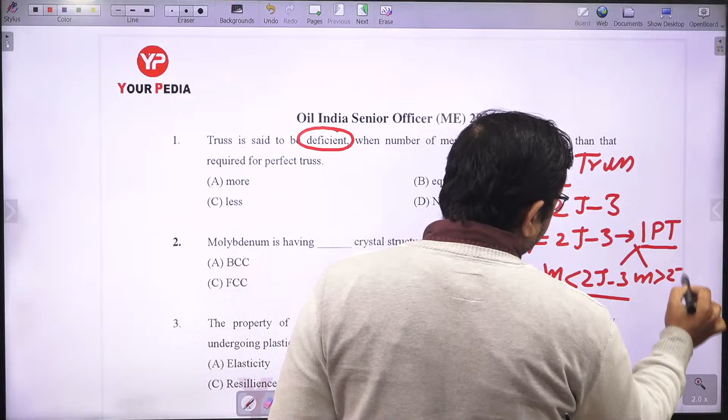So let's start. First question: the truss is said to be deficient when the number of members in truss are (fill in the blanks) than that are required for a perfect truss. For a perfect truss, the number of members must be equal to 2j minus 3, where j is the number of joints and m is the number of members. This is the condition for a perfect truss. But if m is not equal to 2j minus 3, this is called an imperfect truss. In imperfect truss we have two conditions: if m is less than 2j minus 3, this is called a deficient truss; if m is greater than 2j minus 3, this is called a redundant truss. So for deficient, the number of members is less than the actual required member. The correct answer is option C.

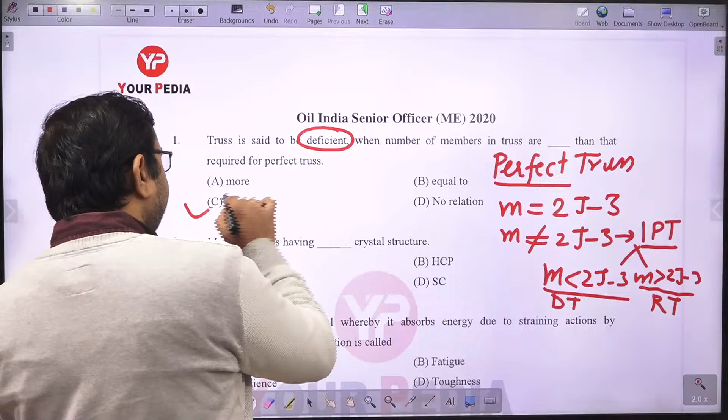Next question: Molybdenum is having (fill in the blank) crystal structure. The correct answer is option A.

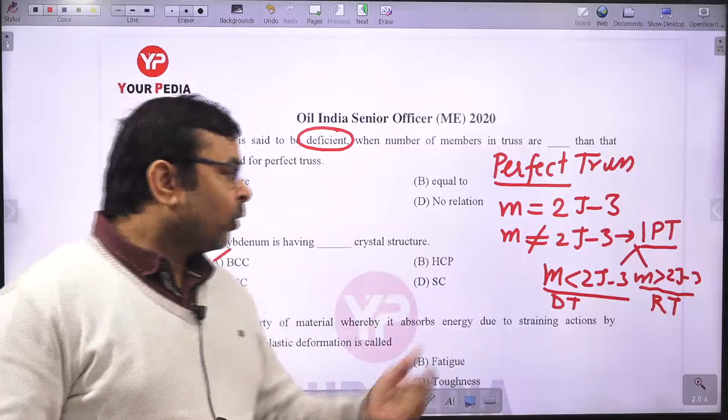Okay, let's see another question. The property of material where it absorbs energy due to straining action by undergoing plastic deformation is called as...

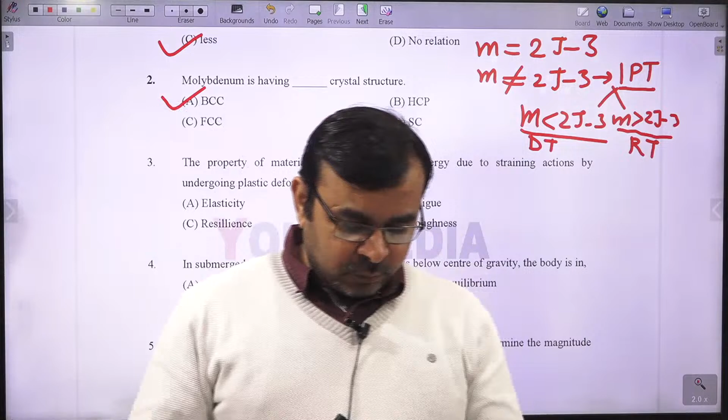This is practice for you, so you must give your answer. Rishabh Dev Mishra, this is for mechanical engineering, not for electronics. So now tell me which one is the right answer.

Option C? That is resilience. Absolutely wrong. Let's see why this is wrong. Here it's asked about undergoing plastic deformation, and resilience will always consider elastic deformation. But here what is happening is plastic deformation. So you must remember this point. This is very important.

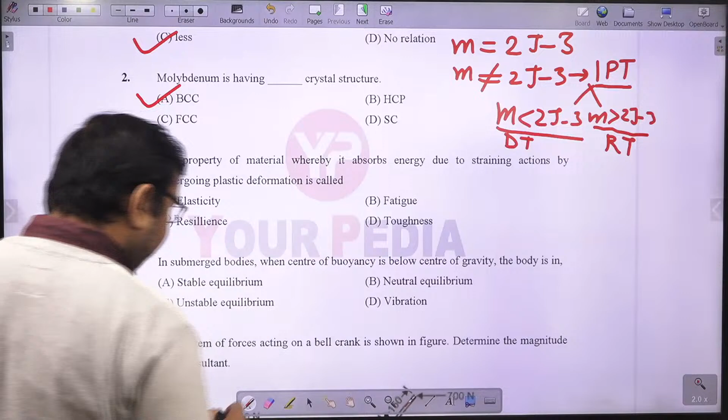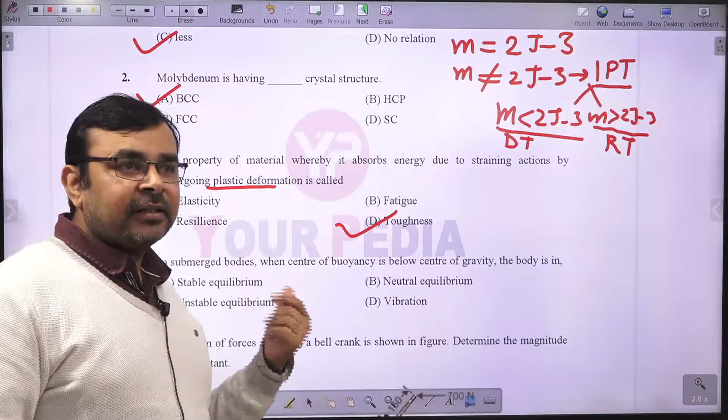Elasticity is different. It just indicates the Young's modulus, you can say, or how much material can regain their original shape and size up to what load — that represents elastic limit.

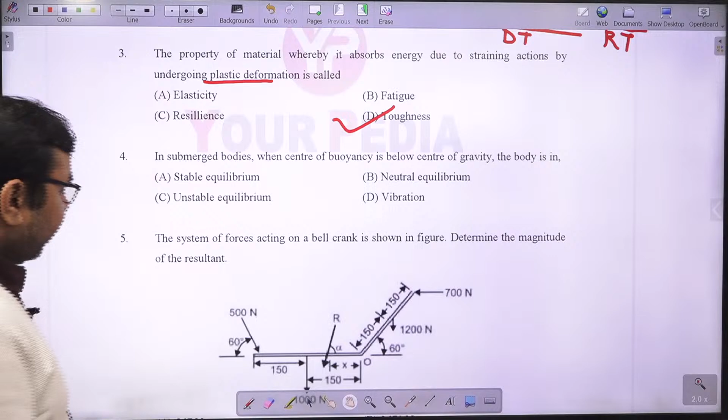Okay, what about the next question? In submerged body, when center of buoyancy is below center of gravity, is that right? Center of gravity, submerged body. Once again, we have two types of bodies here, correct? Floating body and submerged body.

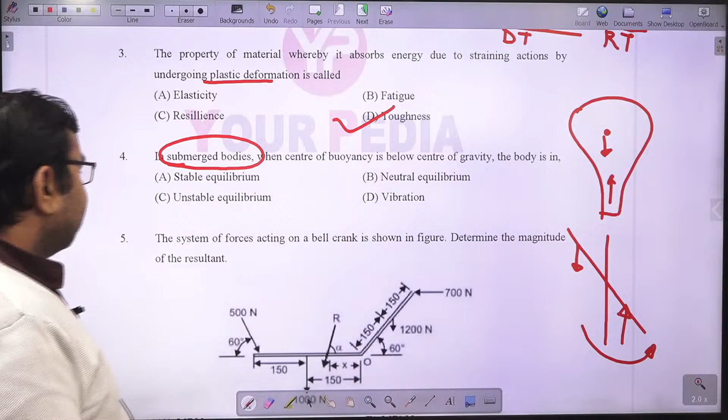It means this is again option A, stable equilibrium. Tell me which one is the right answer. See, already I told you, this is gravity force, this is buoyancy force, and if you deflect this system by a very small angle, then again a moment is acting for making more deviation from its actual position.

So this is the condition for unstable equilibrium, not stable equilibrium. This is unstable equilibrium, sorry, not stable equilibrium. Don't make mistake like this. For stable equilibrium, buoyancy force must be...

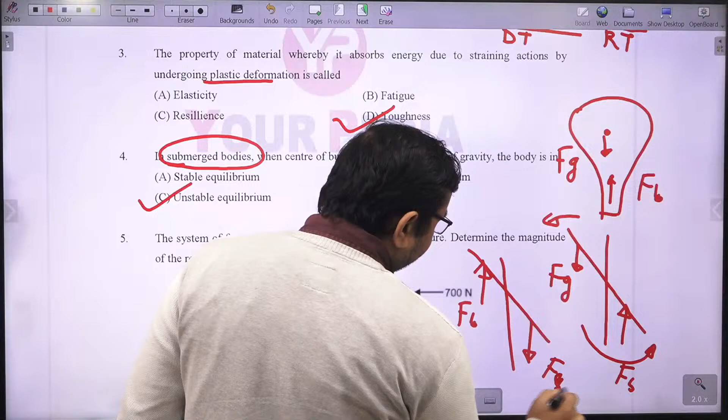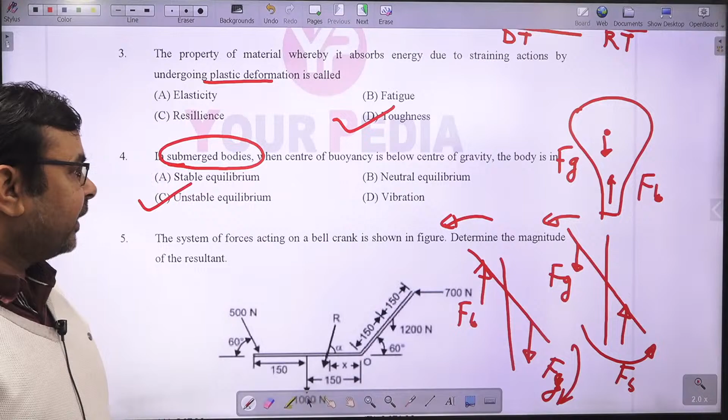Let's suppose buoyancy force is acting somewhere here, gravity force is acting somewhere here. Now you can see, if you make a little deflection, these two forces produce an opposite couple, so they can balance it. So for stable equilibrium, the buoyancy force must be over the gravitational force. So don't make mistake like this.

Okay, let's see another question. The system of forces acting on a bell crank is shown in the figure. Determine the magnitude of resultant force. Tell me how you calculate. This is a very lengthy question. You just try to solve this.

You need to resolve all the forces along the horizontal and vertical. I'm not solving completely, just giving you a hint. First you resolve all the forces like this. If this force is acting like this, then you resolve this component: this is 500 sine 60 degree, similarly this is 500 cos 60 degree. Rest of the forces are exactly horizontal and vertical, only this force needs resolving.

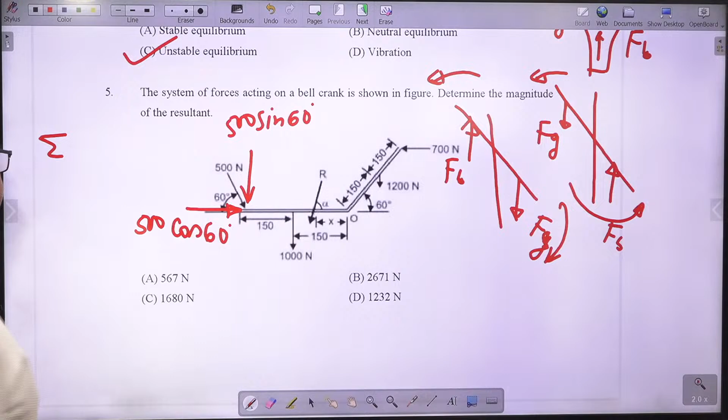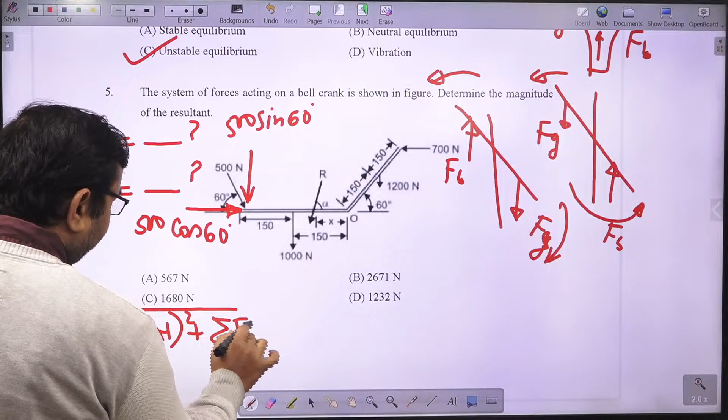After resolving, you need to write summation of horizontal force, then summation of vertical force. Once you get horizontal and vertical force, the resultant must be the square root of summation of horizontal force squared plus summation of vertical force squared.

So by using this formula you can find out the resultant, and after solving, the correct answer will be 2671 Newton. So I'm just giving you the hint, you just try to solve it.

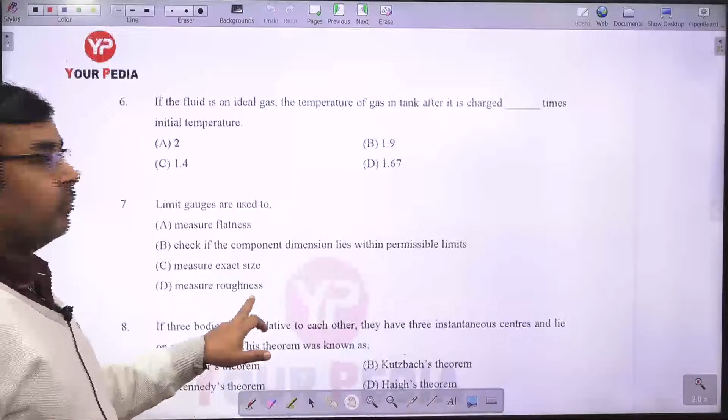Okay, let's see another question. Now you can see here, if the fluid is an ideal gas, the temperature of the gas in the tank after it is charged, fill in the blanks, times initial temperature. So tell me, what is the right answer?

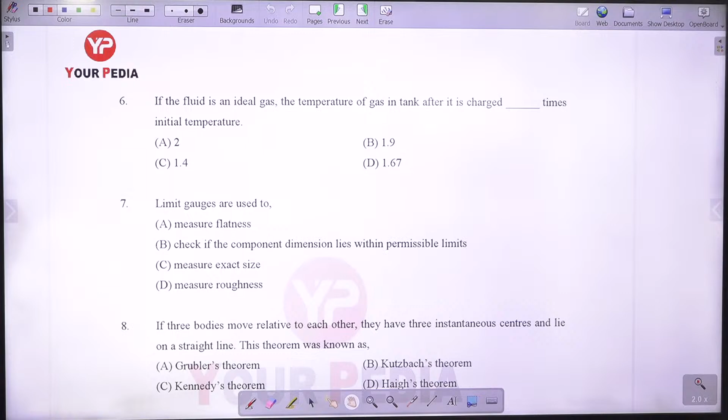If the fluid is an ideal gas, the temperature of the gas in the tank after it is charged is... fill in the blanks. The correct answer is option C, that is 1.4 times.

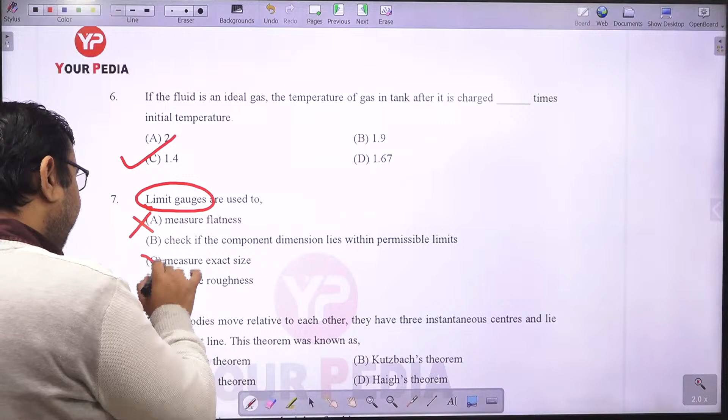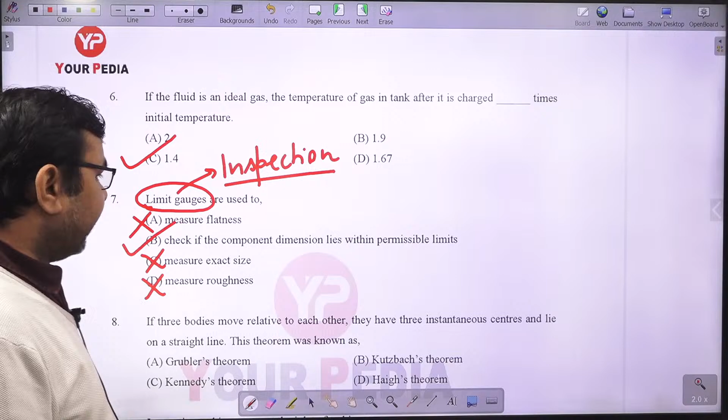Next question: limit gauges are used to... Limit gauges are always used as an inspection tool. Can you measure flatness? No, it cannot be measured. Measure exact size, measure roughness? I already told you limit gauge is an inspection tool, not a measuring tool. So the correct answer is option B: check if the component dimension lies within the permissible limit or not.

Next question. If three bodies move relative to each other, they have three instantaneous centers and they lie on a straight line. This theorem is known as... tell me which one is the right answer. This is called Kennedy's theorem.

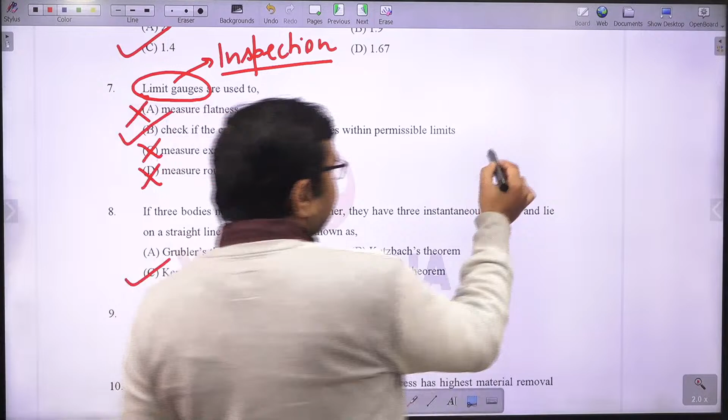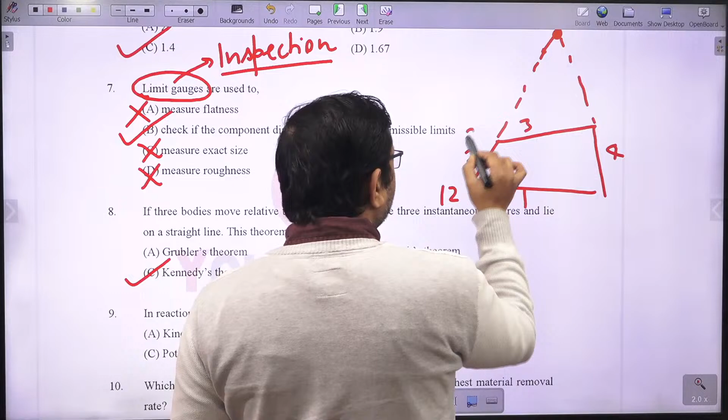You can see here, let's suppose if you have a four-bar mechanism, and if you extend this line, then you will get some instantaneous centers. Let's suppose this is link 1, 2, 3 and 4. So this is instantaneous center 1-2, this is 2-3, and this is 1-3. You can see here three instantaneous centers lie on a straight line. Similarly, here you can see 1-4, 3-4 and 1-3 all in a straight line. So this is given by Kennedy's theorem.

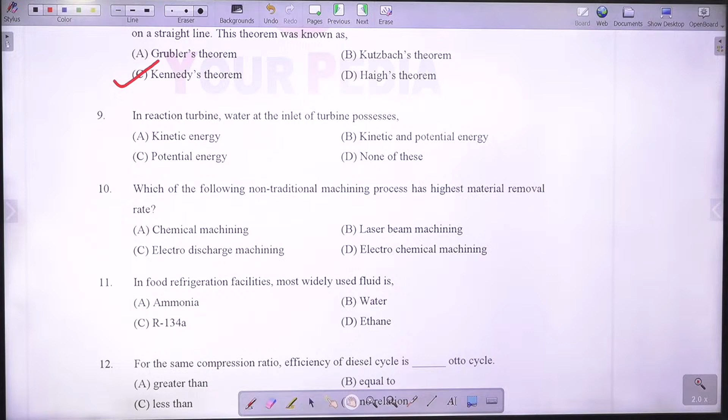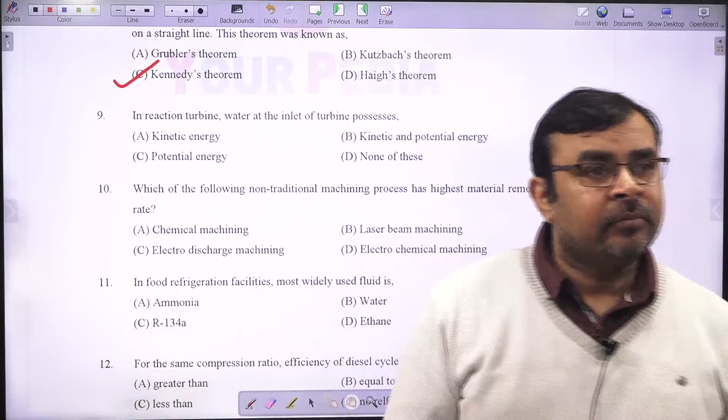Next, in a reaction turbine, water at the inlet of the turbine possesses kinetic and potential energy, or none of these. Tell me which one is the right answer. Option B, yes, kinetic and potential energy is the right answer.

Which of the following non-traditional machining processes has the highest material removal rate? Just remember this shortcut: PCD, UAE, L — pitch circle diameter, United Arab Emirates, and L. Remember it in this sequence, in decreasing order. P stands for plasma arc machining, which has maximum MRR. Then electrochemical machining, then electric discharge machining, then ultrasonic machining, then abrasive jet machining, then electron beam machining, and at the last, laser beam machining.

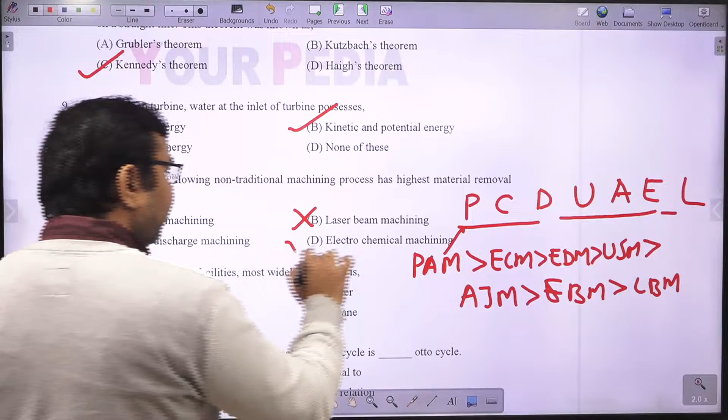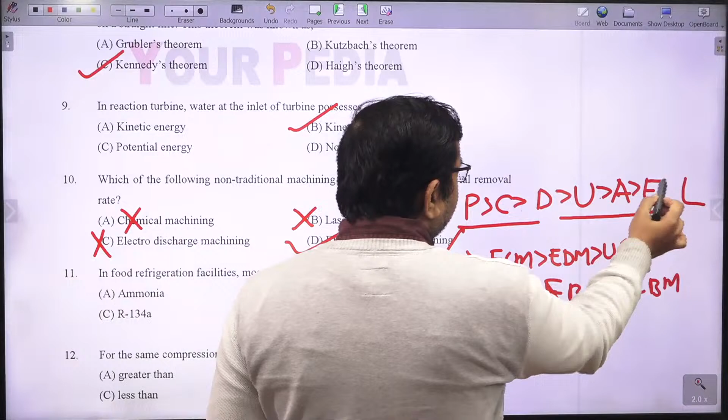So you can see here, chemical machining is the wrong answer. Laser beam, wrong. Electric discharge, no. Electrochemical machining is the right answer. Yes, option D, Kapil, very good. Option D is the right answer. Just remember it like this: PCD, pitch circle diameter, United Arab Emirates — that is the decreasing order of MRR.

In food refrigeration facilities, the most widely used fluid is... tell me which one is the right answer. R134A, yes, this is the right answer.

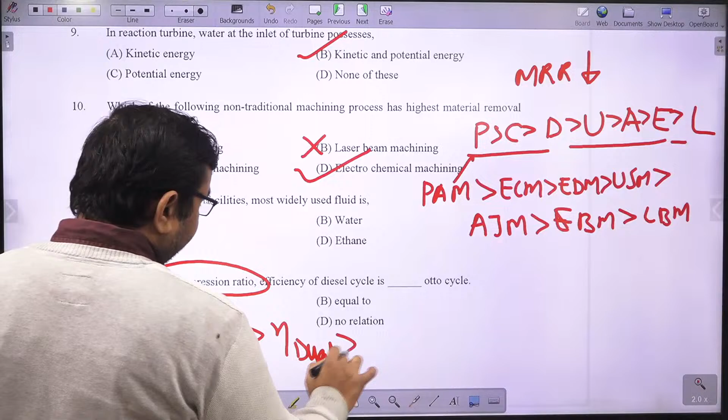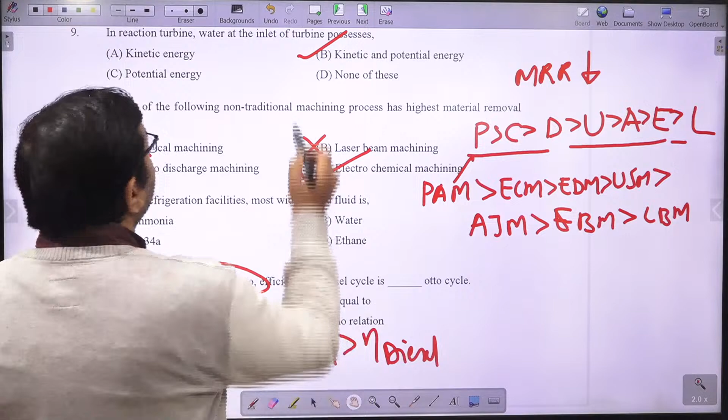For the same compression ratio, efficiency of the diesel cycle is... fill in the blanks, times Otto cycle. Tell me which one is the right answer. For the same compression ratio, efficiency of Otto cycle is greater than dual cycle, which is greater than diesel cycle. So efficiency of diesel cycle is less than the Otto cycle. Option C is the right answer. Very good, Kapil, your answer is right.

Next question: voltage in case of resistance welding process. In resistance welding, if you remember, we have very less voltage. We use current, and very less resistance — lower the resistance, higher will be the current. And obviously we have resistance in the micro-ohm range. So the correct answer is option D, this is the least value.

Micrometer measuring faces are tipped with what to prevent rapid wear? Tell me which one is the right answer: chromium, molybdenum, tungsten carbide, or copper. The answer is whichever is the hardest material here, that is tungsten carbide.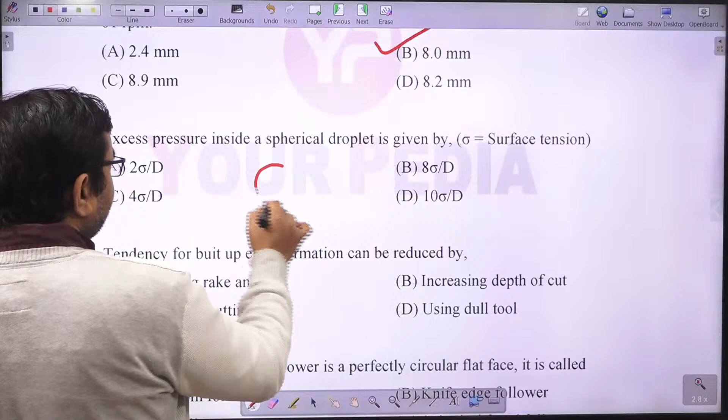Excess pressure inside a spherical droplet is given by this formula. This is a droplet, not a bubble - droplet means this is solid. So what pressure do we have inside? Tell me which one is the right answer.

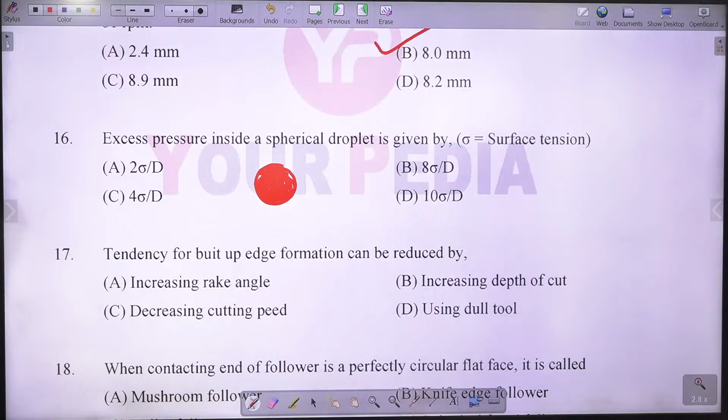16C, yes, 4 sigma by D is the right answer.

Very good. Tendency for built-up edge formation can be reduced by increasing rake angle, increasing depth of cut, decreasing cutting speed, or using a dull tool. We need to find out what reduces the tendency of built-up edge formation - is it increased rake angle, increased depth of cut, or decreased cutting speed? This is speed, not peed - this is speed.

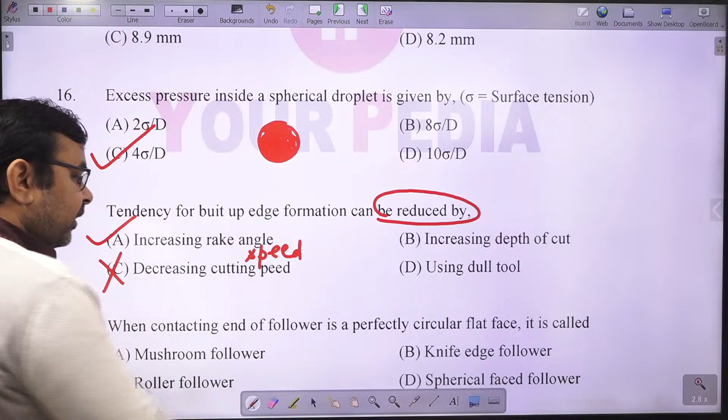Correct answer is option A. This other option is wrong - if you decrease the cutting speed, the heat transfer rate will reduce. Increasing depth of cut is also wrong. Using a dull tool is also wrong.

When the contacting end of the follower is a perfectly circular flat face, it is called as - 18A, yes, mushroom is the right answer. Mushroom follower is the right answer.

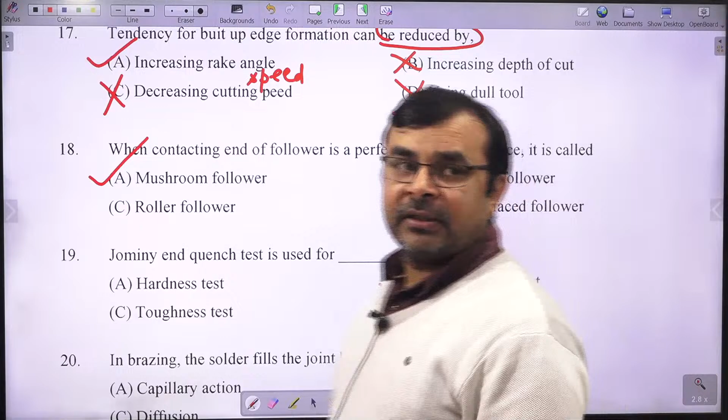The correct answer is Jominy end quench test is used for hardenability. Hardenability means formation of martensite - yes, 19B is the right answer. It represents the formation of martensite. It is the ability of a material to form martensite, that is called hardenability, and it is tested by the Jominy end quench test.

In brazing, the solder fills the joint by - see, in both soldering and brazing, the joint is filled by capillary action only. But instead of soldering or brazing, if you have braze welding, then the metal is filled by gravity action. Is that right? This is wrong answer, Kapil - it's capillary action, not diffusion. In brazing, the solder fills the joint by capillary action.

Okay, let's see another question.

Transmissibility is the ratio of - this is from vibration. Tell me, is it force applied upon force transmitted, force transmitted by force applied, or damping coefficient by critical damping coefficient? 21B, yes, force transmitted over force applied - this is called the transmissibility ratio.

The ratio of the power available at the shaft of the turbine to the power delivered to the runner is called hydraulic efficiency, volumetric efficiency, mechanical efficiency, or overall efficiency. Tell me which one is the right answer. Somesh Jha, Kapil, and Anime all say 22C.

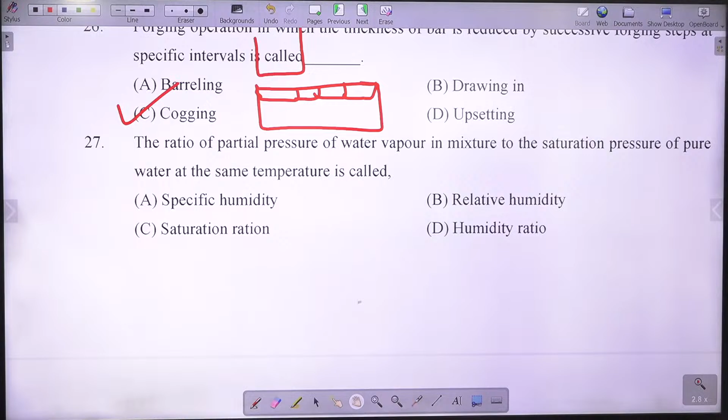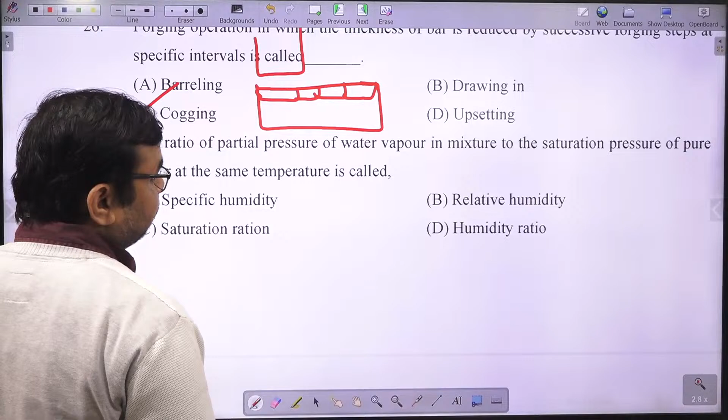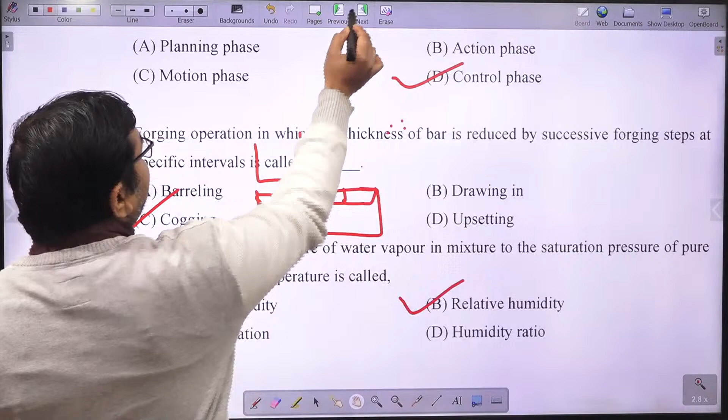The ratio of partial pressure of water vapor in mixture to the saturation pressure of pure water at the same temperature is called relative humidity. Yes, option B is the right answer. Very good, option B is the right answer.

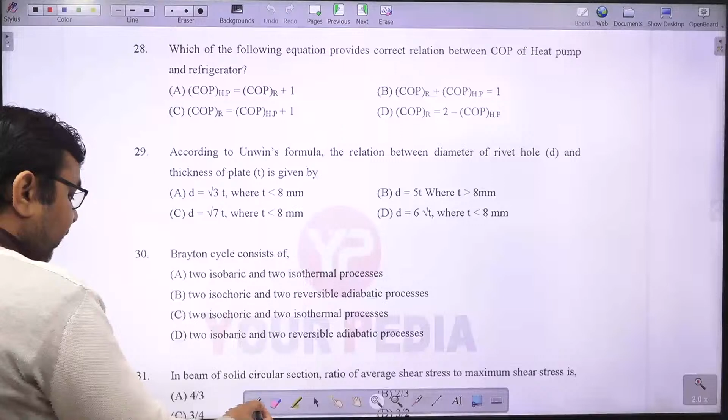Which of the following equation provides correct relation between COP of heat pump and refrigerator? This is a very common question. COP of refrigerator and COP of heat pump ke beech mein kya relation hai, jaldi se bata do. Anyone tell me which one is the right answer? See, so COP of heat pump is always equal to the COP of refrigerator plus 1.

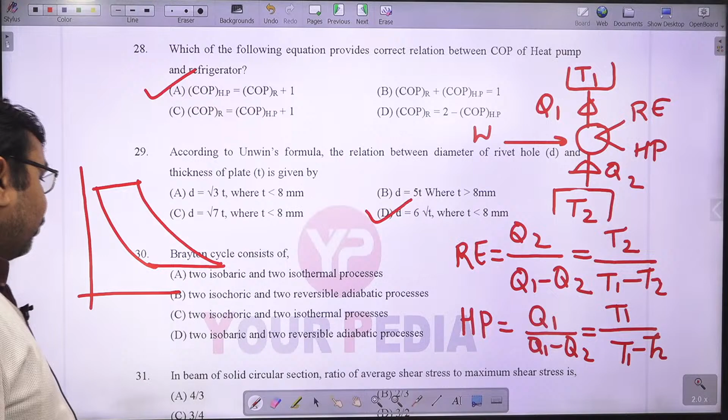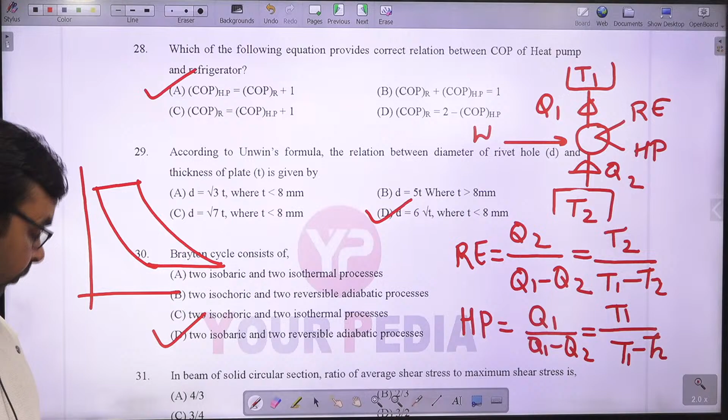Brayton cycle consists of, tell me, Brayton cycle mein kya hota hai? In Brayton cycle we have two constant pressure process and two isentropic process. Two isentropic and two isobaric - isobaric and reversible adiabatic process. Yes, option D.

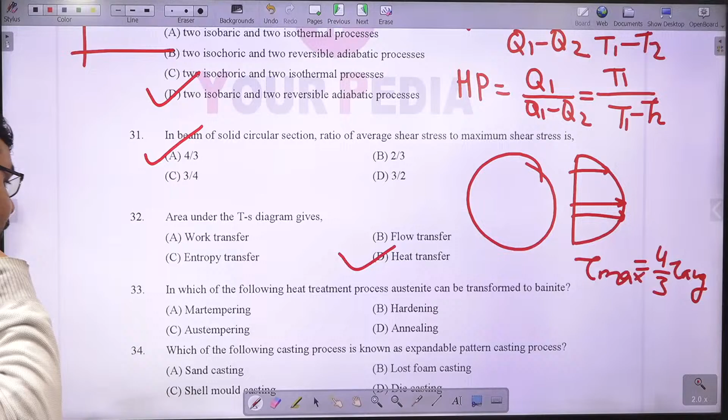In which of the following heat treatment process austenite can transform to bainite? So you must remember this is Austempering process.

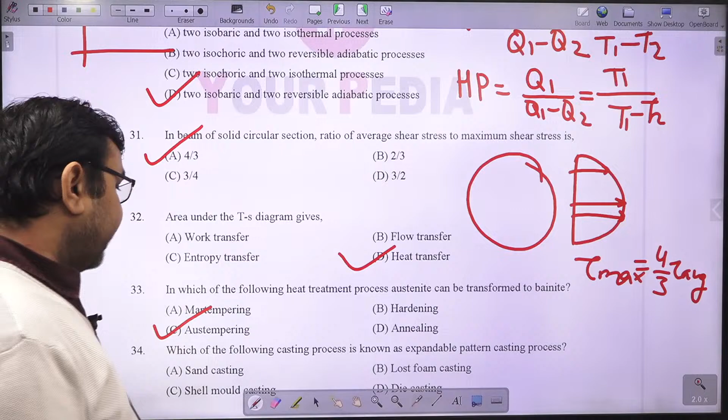Which of the following casting process is known as expandable pattern? This is expandable pattern. Expandable pattern means that process in which every casting needs individual pattern. Is it right? So which one is the right answer - sand casting, lost foam casting, shell molding and die casting. In sand casting we use permanent pattern. Shell molding we always use permanent pattern. Die casting also. So the correct answer is option B, lost foam process, in which we use a foam.

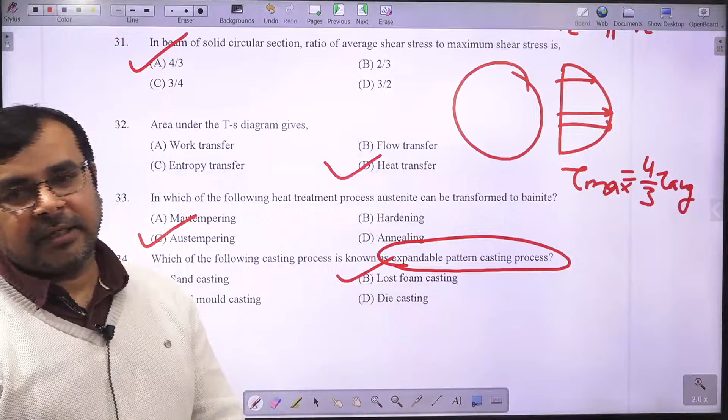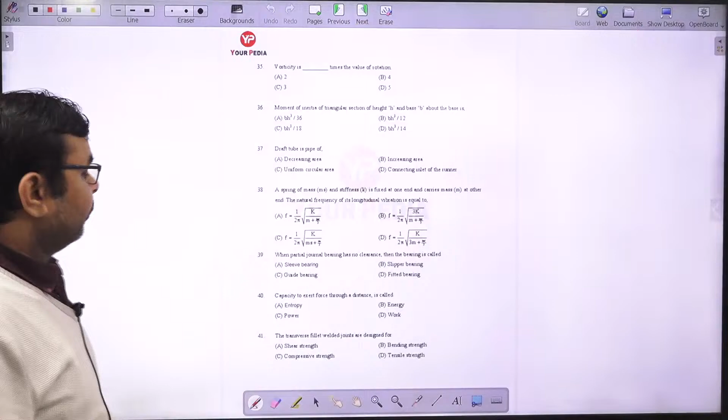Phenol formaldehyde, sorry, polyurethane foam. Correct. You just put the pattern made by polyurethane foam and surrounded by the molding sand, that is plaster of Paris molding sand. Then pour the molten metal and due to this the pattern gets burned properly, yes or no? So it can be dissolved. Okay, so let's see.

Vorticity is, fill in the blanks, times the value of rotation? Very simple question, that is 2. That is 2, yes or no?

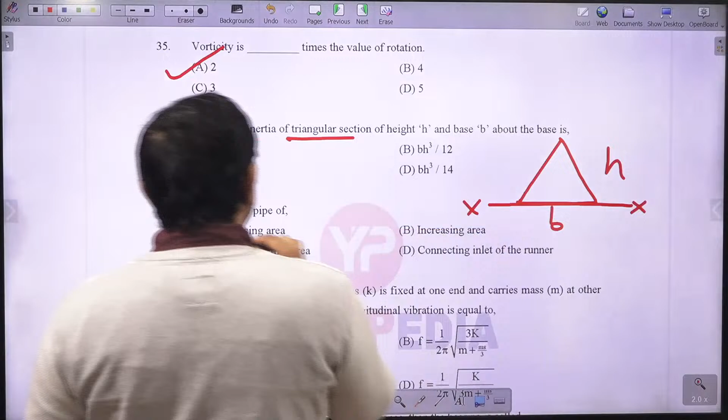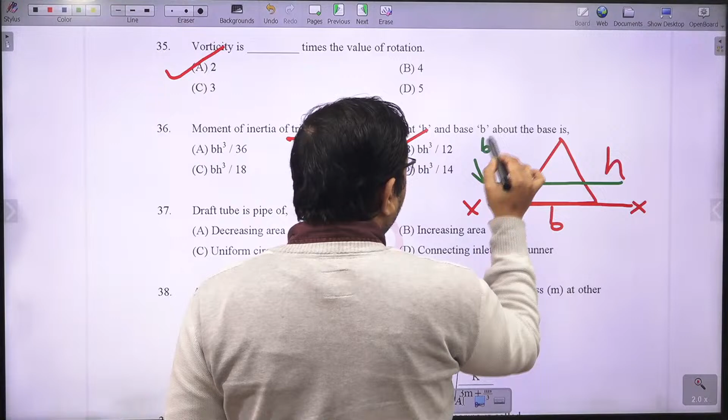Moment of inertia of triangular section whose height is h, base is b, about the base, we need to find this out. The moment of inertia was bh cube by 12. Let's suppose if you want to calculate moment of inertia about its centroid, then moment of inertia about this centroidal axis is bh cube by 36, but about this base we have bh cube by 12. Is it right? Just apply the parallel axis theorem for determining this.

Draft tube is a pipe of decreasing area, increasing area, or uniform circular area, connecting inlet of the runner. So the correct answer is increasing area. Draft tube is the increasing area. Yes or no? Draft tube is the increasing area.

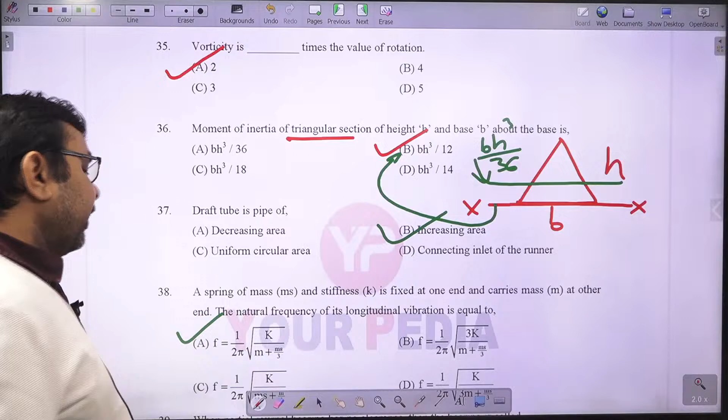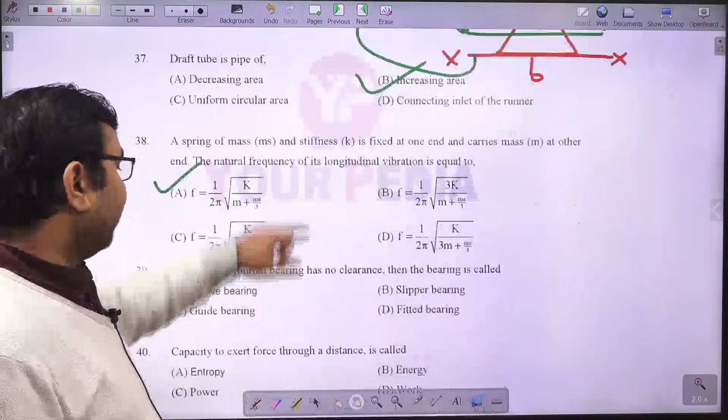A spring of mass m and stiffness k is fixed at one end and carries mass m at the other end. The natural frequency of the longitudinal vibration is equal to. You must remember this formula. This is a standard formula. Frequency is equal to 1 upon 2 pi times square root of k by m plus mass of spring divided by 3. Is it right? So remember this standard formula, you don't have to solve all of them in the question.

When a partial journal bearing has no clearance, then the bearing is called. If a partial journal bearing has no clearance, what do we call it? This is called a fitted bearing.

Capacity to exert force through a distance is called, tell me. This is called work, yes or no? Force into displacement is called work.

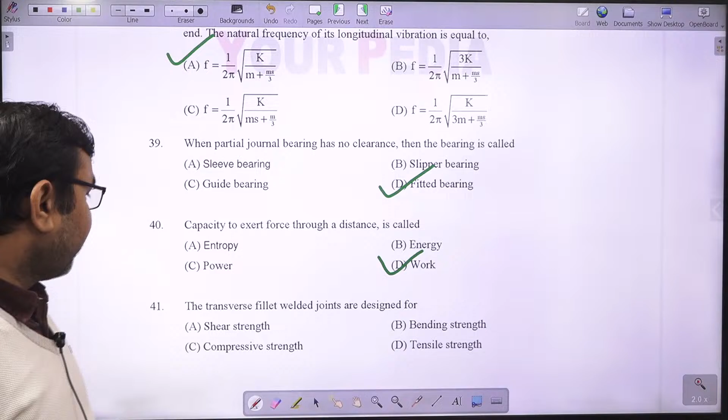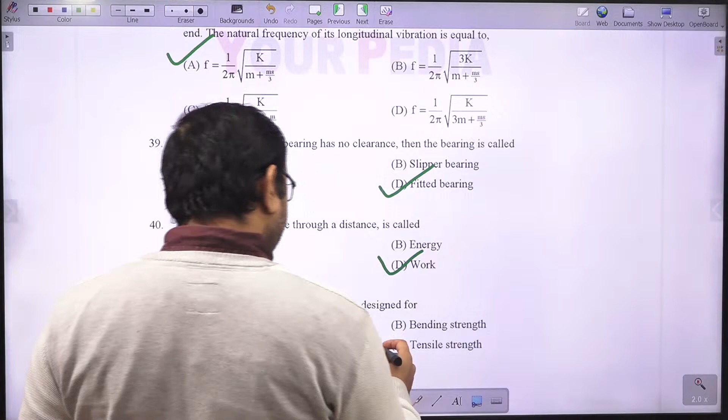Let's see another question. Tell me, the transverse fillet weld joint is designed for what. It is subjected to tensile strength, while parallel fillet welds are subjected to shear strength. So the correct answer is option D. Is that right?

You need to solve in this short amount of time. You have only about 50 minutes to solve these questions, is it right?

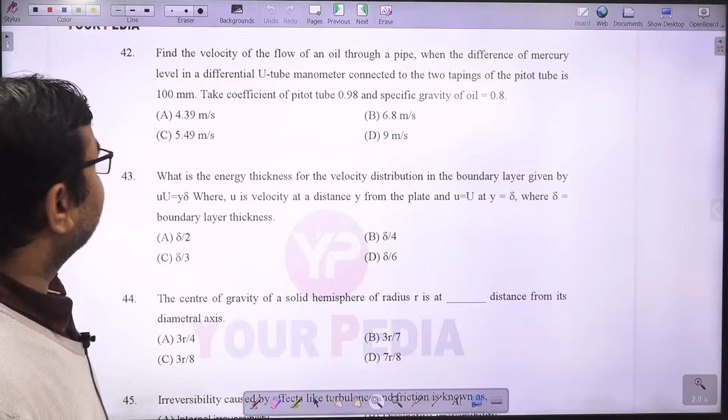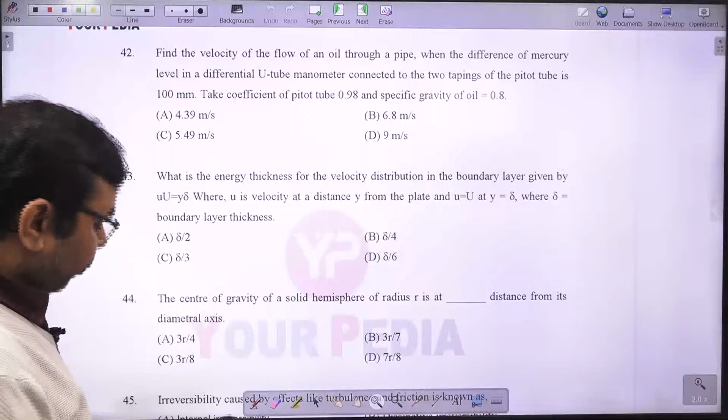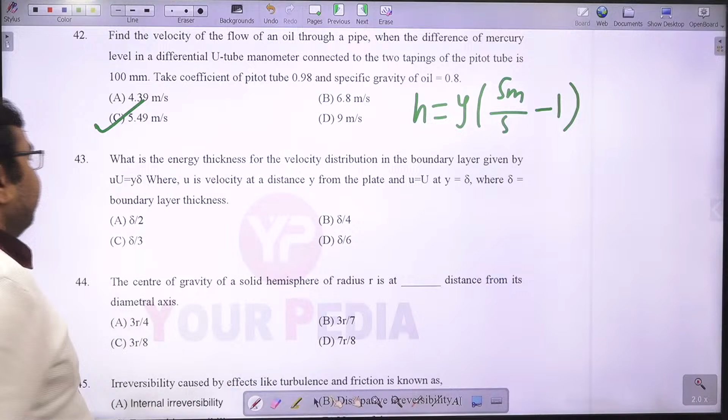Find the velocity of flow of an oil through a pipe when the difference of mercury level in a differential U-tube manometer connected to the tappings of the pitot tube is 100 mm. Take coefficient of pitot tube as 0.98 and specific gravity as 0.8. Just apply this formula: H is equal to y times Sm by S minus 1. You put these values here, then you will get the answer. When you solve this, you get option C. Option C is the right one.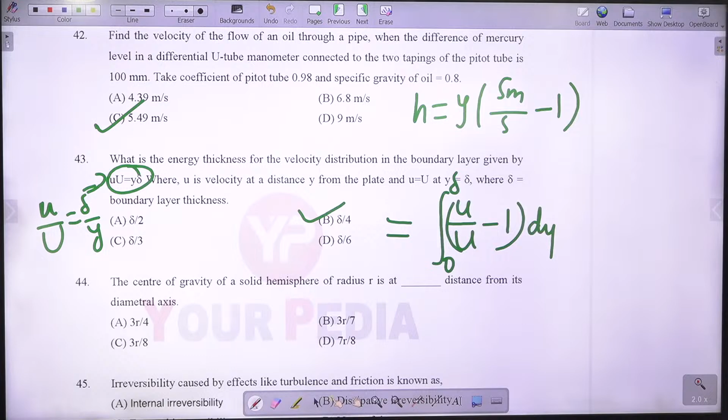Let me check this question, actually in this we have some printing mistake. Let me check. Okay, so now I'm just giving you the answer: this is delta by 4. I think in this we have some printing mistake, so just leave this question.

The center of gravity of a solid hemisphere of radius r is at, fill in the blanks times. So this is 3r by 4. Correct answer is 3r by 4.

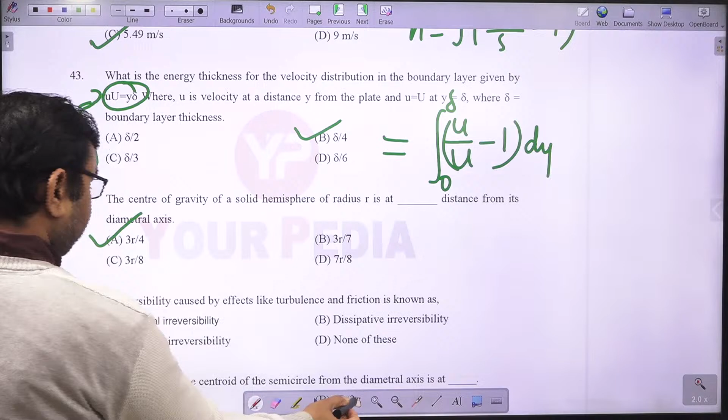Irreversibility caused by effects like turbulence and friction is known as: internal irreversibility, dissipative irreversibility, external irreversibility, or none of the above. Which one is the right answer? So the correct answer is internal irreversibility.

The distance of the center of gravity of the semicircle from the diameter.

So actually, this is 4r by 3 pi. So the correct answer is option B.

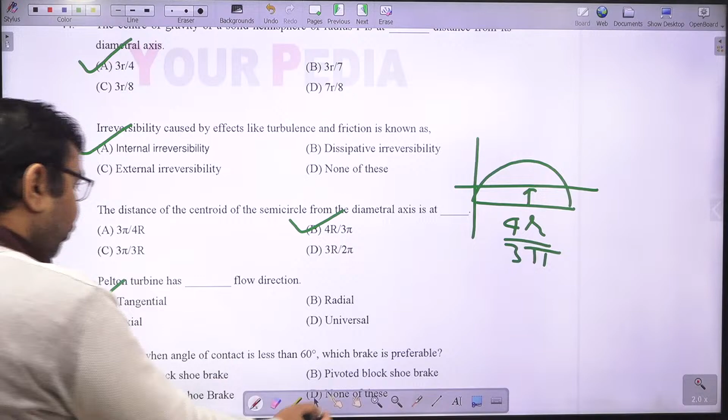Pelton turbine has, fill in the blanks, flow direction: tangential flow, radial flow, axial flow, universal flow. So the correct answer is, tell me anyone? Tangential flow.

In brake, when angle of contact is less than 60 degree, remember single block shoe brake is used. Is it right? Okay, let's see a few more questions.

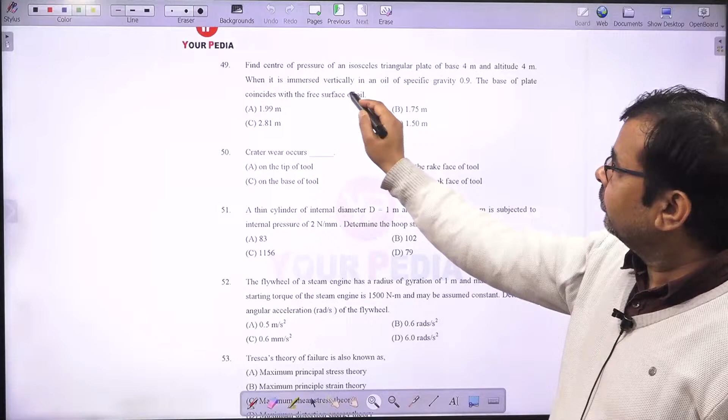Find the center of pressure of an isosceles triangular plate of base 4 meter and altitude 4 meter, when it is immersed vertically in an oil of specific gravity 0.9, such that the base of the plate coincides with the free surface of the oil. This means it is looking like this. So you need to find out the center of pressure.

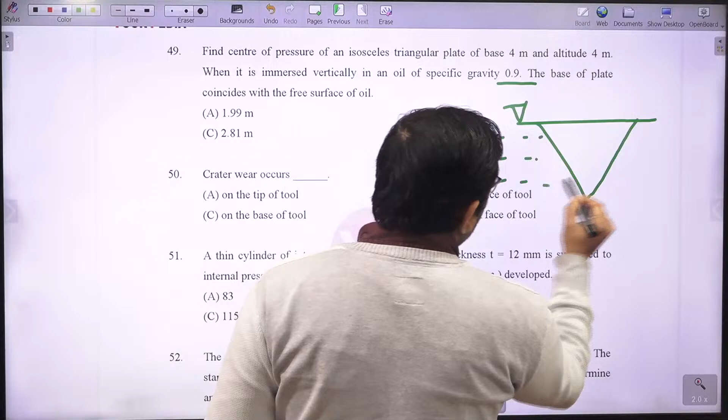Here we have the datum level, and here we have oil. So actually you need to find out center of pressure, where it lies on the center of pressure.

So we have this formula, you just apply it: h is equal to I by AX bar plus H bar. If you apply this formula, then you get this answer. I'm not calculating, you just calculate. I'm giving you a hint, yes or no.

Crater wear occurs. In metal cutting we have two types of wear: crater wear and flank wear. Crater wear always happens on the rake surface and flank wear happens on the flank surfaces. So the correct answer is on the rake surface of the tool.

A thin cylinder of internal diameter d equal to 1 meter and thickness t equal to 12 millimeter is subjected to internal pressure of 2 Newton per millimeter square. Determine the hoop stress. Hoop stress or circumferential stress is given by PD by 2T. You just put all the values here, but make sure the diameter is in millimeter. So this is 2 Newton per millimeter square.

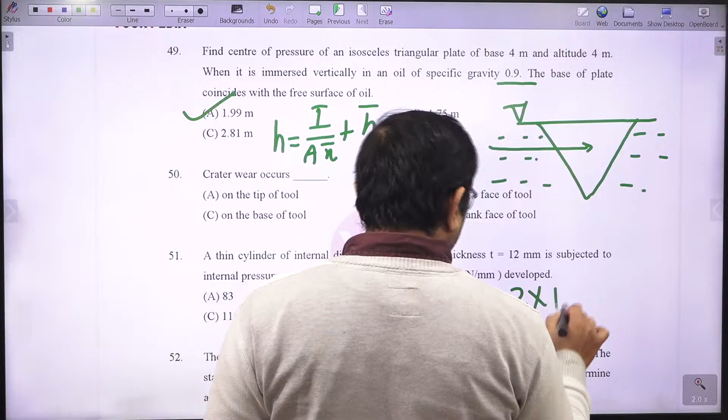Diameter is 1 meter, means 1000, over 2 times of thickness, that is 12. By solving this you get the answer, and according to my answer I'm getting 83 Newton per millimeter square. Is it right? 83 Newton per millimeter square.

Okay, let's see two more questions. Flywheel of a steam engine has a radius of gyration of 1 meter and mass of 2500 kg. The starting torque of the steam engine is 1500 Newton meter and may be assumed constant. Determine the angular acceleration of the flywheel. You need to find out angular acceleration.

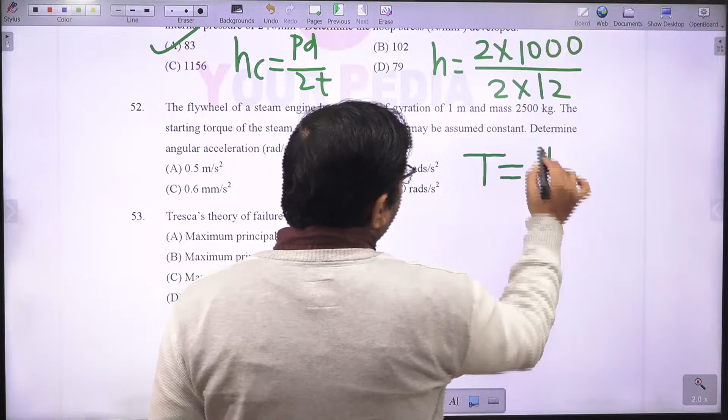For this we use the formula T is equal to I alpha only. If you remember this basic principle, then you can solve easily. Here the torque is given, I is given, alpha you need to find, and according to my calculation I'm getting 0.6 radian per second square as the answer. Is that right? You can also check.

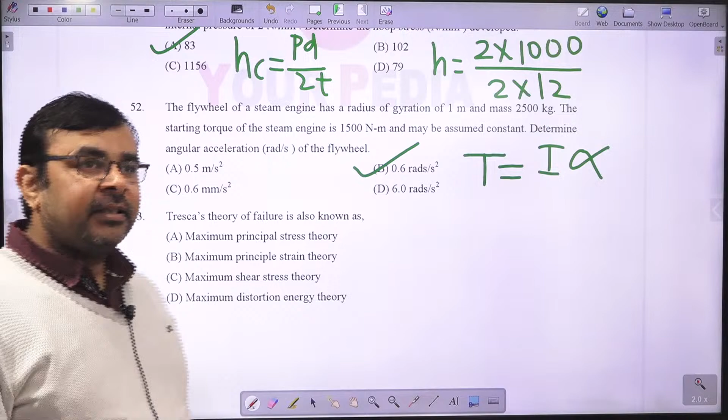Tresca theory of failure is also known as Tresca theory. Tresca theory is actually the maximum shear stress theory. Maximum shear stress theory is also called Tresca theory or J.J. Guest and Tresca theory. So option C is the right answer.

So this is all about a question from the Oil India Limited 2020 question paper. So friends, once again, I am telling you this is a very nice opportunity for you guys.